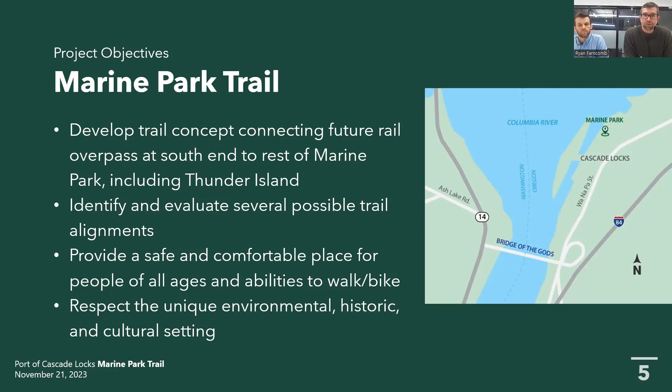Just a quick summary: we've done a lot of engagement as part of this project. We've had a couple of consultation meetings with the tribes, both virtually and in person, to understand tribal interests and desires from this trail project. We've had 5 presentations to the Port Commission, along with a site visit with the Marine Park Subcommittee, and a couple of online outreach periods to get general feedback from the public and community and park users about how they use the park and what they might want to see in terms of safe pedestrian and bicycle access.

And with that, I'll hand it over to Nadine. Great, thank you so much, Ryan. Again, my name is Nadine Appenbrink, and I'll be going through some of the engagement findings as well as the alternatives, like the trail alignment alternatives that we considered, and throughout identifying the preferred route.

So briefly, we had two engagement milestones, the online surveys. The first one was a bit more general - we asked community members to share with us what they like in a trail and what they might like in a trail in Marine Park. The second one got a little bit more specific as to how people envision using this trail and what's most important as we move forward into design.

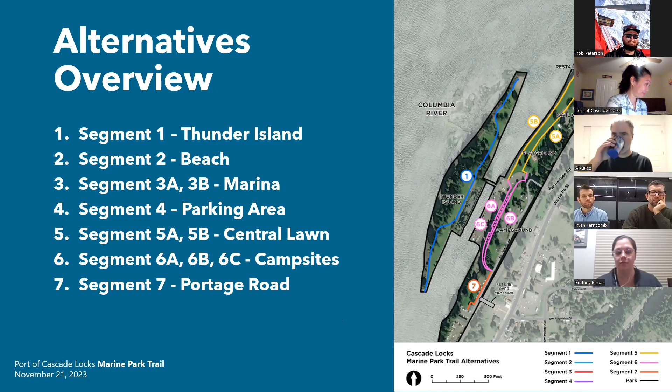Rob has his hand up. Yes, hi, about when that community survey was conducted - there was one, I believe, December 1st, 2021. If you look at the neighborhood Facebook group, there's a post about that in '21. Great, thank you.

Any other questions or comments before we move on to the alternatives? I'll have more later. Great.

All right, so I'll cover the alternatives overview, and then I will be handing it over to Stefan to talk a little bit more about the design work that we did most recently.

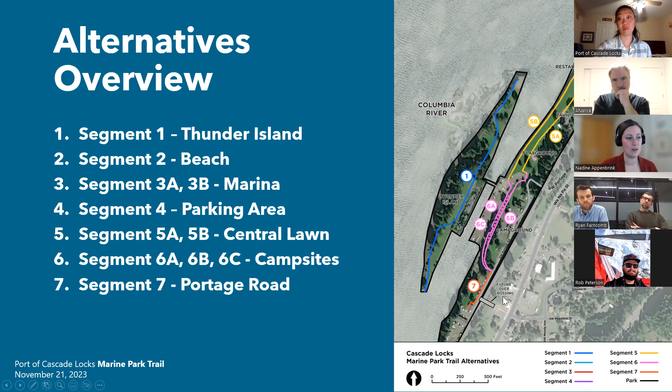So just looking at this map, we sort of looked at the trail alignment options in segments, based on the natural environment, the conditions, as well as the different types of uses that are present in the park. So segment 1 is Thunder Island, and then we start up at the top near the beach, segment 2, and then all the way down to segment 7 at the bottom end of the park.

So we've got a slide for each of the segments. Thunder Island, notable about this segment will be a gravel path, unlike the rest of the trail, which will be paved. This one will be gravel in order to minimize subsurface disturbance, as well as to contribute to the more natural feeling environment out on the island.

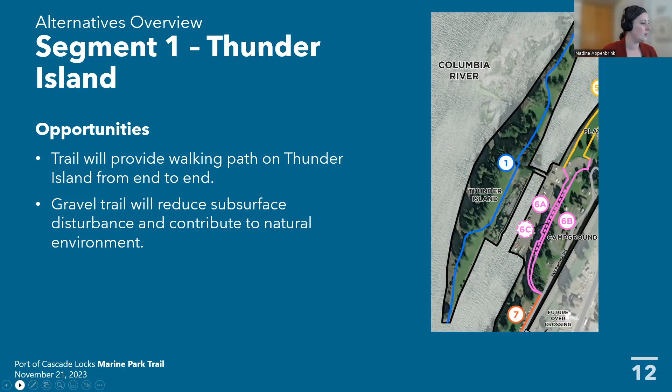Oh, is this? Here we go. There's a little bit of a lag. I'm having a little bit of a lag. Here we go. Hopefully this will stay on this slide.

So we'll move on to, oh, actually I see a hand up. Okay, go ahead, Rob. Just a quick question about the gravel trail. Will that impact ADA access or access to bicycles?

That's a great question. As far as bike access, we expected that there wouldn't really be much bike activity on the island, just because it is a bit more remote and it's really not that long. We expected more bike activity to be in the main part of the park, the mainland part, especially with connections to other trails.

As far as ADA, Stefan, do you have a response to that? Is the gravel ADA accessible? Two responses: the trail itself, we can use a material that is part of ADA accessibility requirements, so that wheelchair users, anyone rolling, it's still accessible. And then the second comment is we didn't place a super high emphasis on it, just because there's stairs down to the bridge across and no current ADA accessible access over to that.

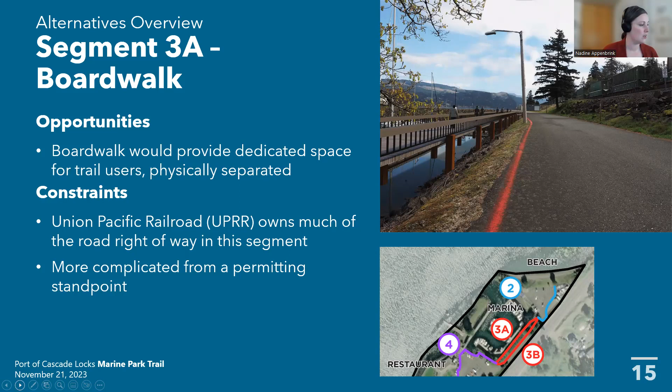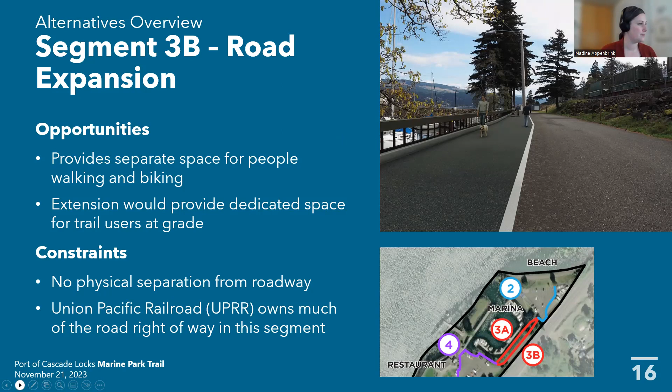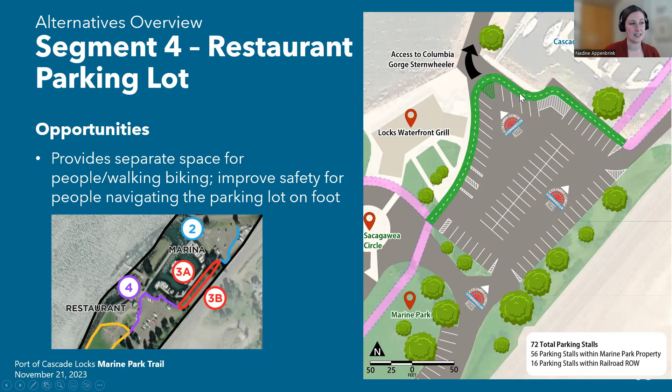We did quite a bit of work in this area to maintain all of the parking stalls so that there wasn't any parking loss. If you have any questions, we can go more into that. We did do turn analysis, and so this has been considered. Again, this segment would also be on existing paved surface to minimize any ground disturbance.

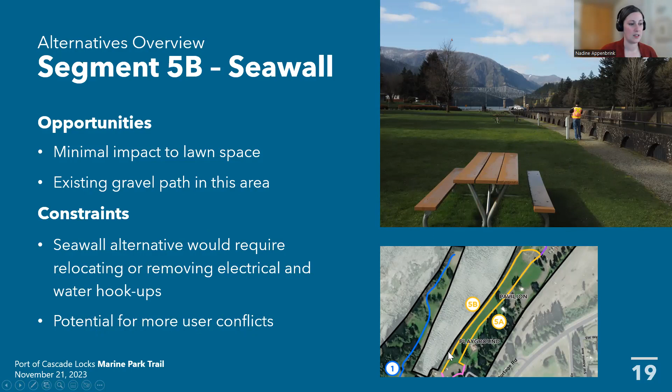So here's the seawall, and here's a picture of that, as you're probably all familiar. This is a narrower trail or path that exists there now. The option to expand this would require removing these water and electric hookups, and there could potentially be more user conflicts in this area. So as I said, we recommend the 5A option.

For segment 6, this is the area of the park also centrally located between the campgrounds and the lower parking lot that's right adjacent to the locks. So that's where we are.

Segment 6A, option A, would be the lower route around at the same grade as the parking lot, at the bottom of that slope. It would go around behind what I think is the restroom building, and as you can see in this visualization, it would require a retaining wall. This one was eliminated due to privacy concerns and impacts to tribal fishers who typically and frequently use this area in the parking lot.

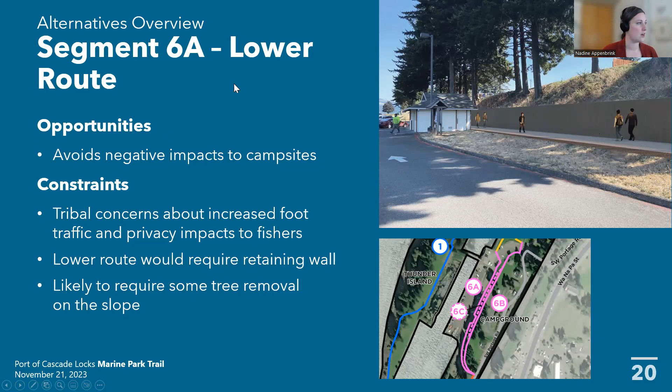The upper route is directly adjacent to the campsites, and this one was also eliminated due to privacy impacts and adjacency problems. This one too would have required a retaining wall. One benefit of this route is that it has really fantastic views right in this area, with views of the gorge being beneficial here.

Eric, I think you need to mute your microphone, Eric.

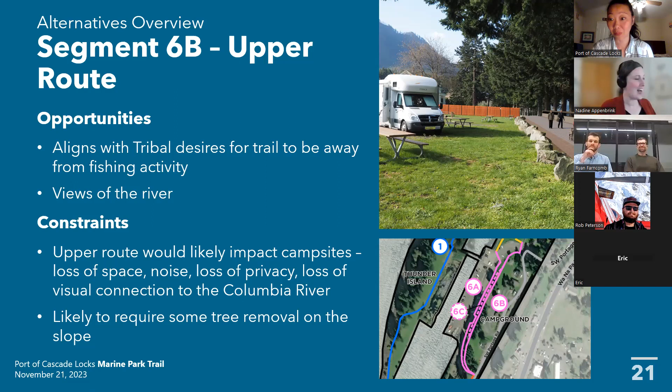It was an acceptable compromise with the tribes, removing people and not adding additional foot traffic in the area where they want privacy, while avoiding impacts to the campground site. As with all of these in this whole segment, it would require tree removal, and the boardwalk is somewhat more costly than at-grade options, which we'll see in a bit.

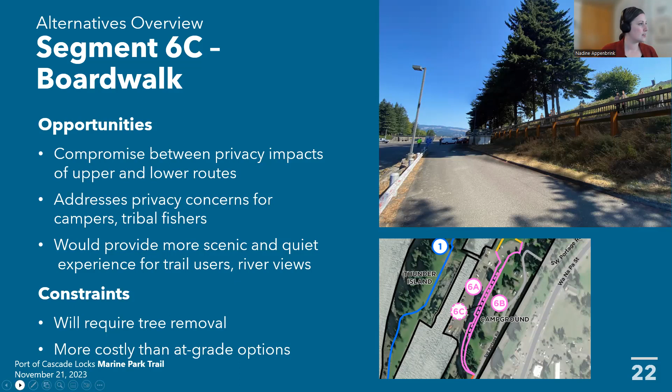And let's see... Sorry, I'm having a little bit of a lag with the slides. All right, so the recommendation—hang on. What can you guys see?

This is where we want to be, the recommended alternatives. As I mentioned, going through these, our recommendations are the boardwalk near the marina, the central lawn route through this central green area, and the boardwalk between the campgrounds and the lower parking lot. Those are really the 3 segments where we had considerations.

I see Rob's hand up. He asks: for the 5A trail that goes through the middle of the big green space, is that going to pass south of the existing Port Pavilion building there, or is it on the other side, the north side? It's on the north, closer to the river. It's an extension of the current path that goes to the pavilion, and then it will just continue to the playground.

That's past the playground. I see, okay. That's like a sidewalk right here, isn't it? There's a little bit of gravel. It's a gravel driveway there. They use it a lot for PCT days when they load in the vendors and stuff.

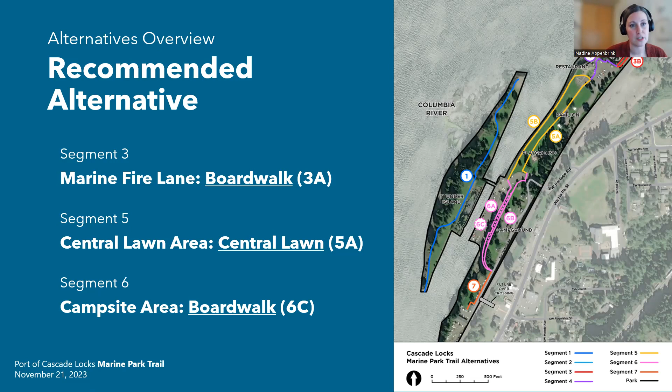I'll also mention, and maybe we can get the commission's perspective on this, that when we've talked with the commission in the past, the discussion was that tree removal was not a major concern for the Port Commission. Maybe Brittany can help me remember the reasoning there, but that was the conversation we've had with the commission about that. I believe there was. I only bring it up because the trees out there are pretty sizable. They're actually kind of landmarks to the area.

And they provide a significant amount of shade and just a great view and a great experience for a lot of our campers. So while the previous commission may have been okay to just chop them all down, I think there might be some difference of opinion with us.

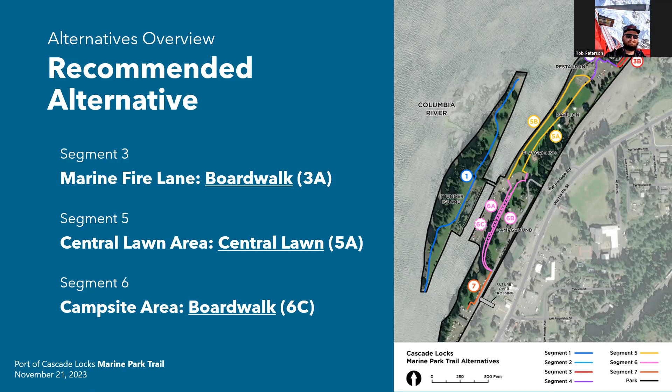Yeah, the last time you met with the commission was probably before July, right? Yes, okay. It was. Yeah.

And we were going to transition into some trail sections so we can talk about trees there, but I'll have a few things to say. I think it's a good segue into the trail sections.

If none of you remember, I'm the engineer on the project, and you can probably tell by the visuals as they're not as nice as Nadine's slides were. But I will run through these quickly, and maybe we can stop on the boardwalk sections because those are a little bit more interesting. In general, this is a 10-foot wide trail throughout the length of the park, including Thunder Island. So segment 1, the Thunder Island section, is a 10-foot wide trail.

This is the only section that will be gravel. And as you had asked earlier, Rob, we can make that ADA accessible per slope requirements and gravel thickness requirements. I won't spend too much time on that. Segment 2, up at the parking lot, is kind of at existing pavement. There'll be a little bit of restriping, and again, it's a 10-foot wide trail there.

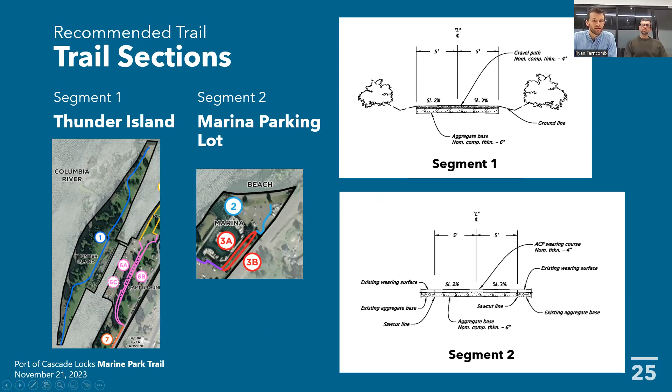Our structural engineer, we've asked him for some opinions on boardwalk types, and he thought a single pier boardwalk here made the most sense just from an environmental impact and cost impact standpoint. So that's concrete columns, concrete pier, and then kind of a steel decking on top with a grippier pattern for when it gets wet. But all of those things would be fleshed out further at final design. I'll pause there.

Yeah, Rob. Yeah, this is probably going to be a very popular spot for our 4th of July fireworks show. I can envision a lot of people hanging out on this. So the one thing I would make sure is the load capacity could handle something full with a bunch of people on it. And then the other security issue is people trying to jump from the railing to the actual secured marina boardwalks in there. So I don't know what the difference is between that railing and the marina boardwalk there.

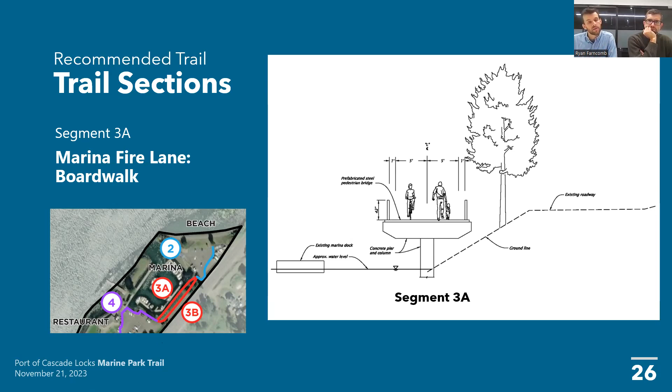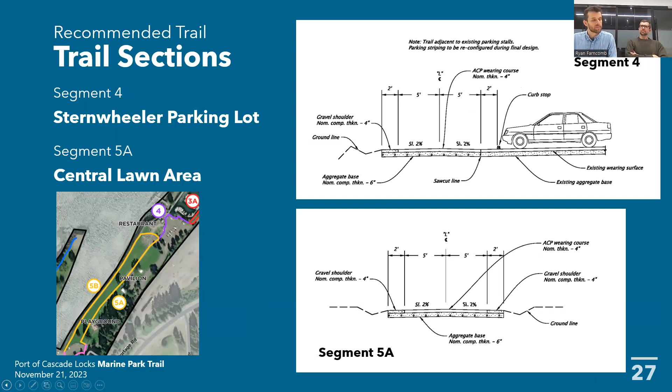Next slide. So 6C, this is our boardwalk alternative through kind of the campground area, and this may be a little deceiving with how those trees are, and we can talk about the tree impacts there. The center boardwalk would likely be a timber boardwalk with timber posts on both sides, so it would kind of fit into the aesthetic of the park a little bit better there and reduce cost a little bit with the timber option.

And we don't have exact tree counts. The benefit of a boardwalk, actually, even though it's running kind of straight through where those trees would be more so, you can thread the needle a little bit more and you can have some sway. And that's another reason for timber versus like a concrete material, is you have some sway to kind of thread the needle through trees a little bit better. You can go down and back up versus the at-grade options of the first two. If you're on the top and you have a retaining wall, like everything's coming out, you can't, the retaining wall is where the retaining wall is, and same with at the bottom.

So I'm not saying that trees won't be taken down. I'm saying that I get that concern as well, and I'm the same way. Those are nice, mature trees, and it's not like you can plant back a fresh tree and it grows.

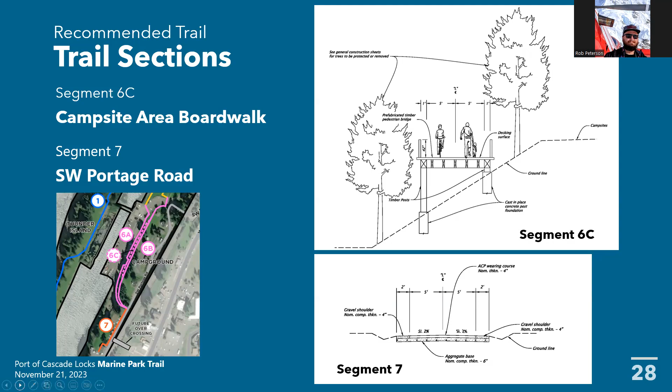Okay, thank you. And that was kind of the end of my section, so we'll kick it back to either. I think it's Nadine, I think, oh yeah, sure.

Yeah, before we get to that, I guess 2 primary questions going back to estimated costs. I saw, further on down the line, we'll probably get to one of these slides later, but as far as the funding elements are concerned, it looks like it says local, state, and federal. So as far as funding all of this, I don't know if you guys are the people to be asking this, or if the general manager is the person to be asking this, but where do we see these financials coming from? And then more specific to you all...

I lost my train of thought because I went down over there.

No additional sources of funding have been found for this project. After this step, we haven't been actively looking for additional opportunities to fund this project during the time they've been working on it. That doesn't mean we're not always passively aware of the options out there that we could potentially get involved in, but we haven't found one that's been a good fit as of yet. It certainly doesn't mean we can't, but we haven't at this time.

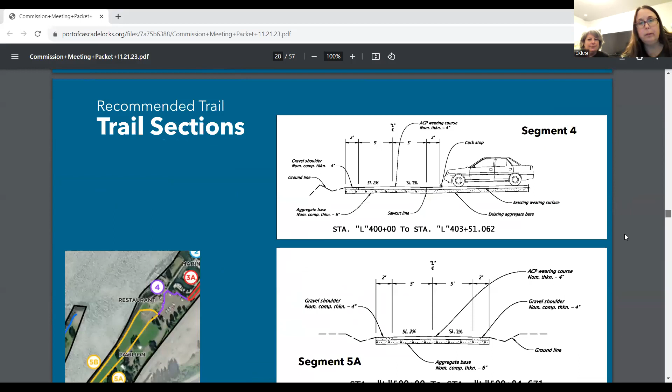We've got the ratification of bills in the amount of $51,754.39, and approval of payroll for October 19th, November 3rd, and November 17th, for a total of $124,578.56. So I would entertain a motion to approve this consent agenda.

A motion to approve the consent agenda—do I have a motion? I make a motion to approve the consent agenda. Thank you, Rob. Is there a second? I'll let you take it, Pam. I'll second.

All right, we have a motion and a second. All in favor to approve the consent agenda in its entirety, say aye. Aye. Aye. Aye. Any opposed? All right.

Moving on, business action items. So item 5A is authorizing the second reading of the Port Ordinance 2023-1, an ordinance regulating conduct on port property, by title. This is one, Jeremiah, that requires a motion and a second to get the authorization to read it by title.